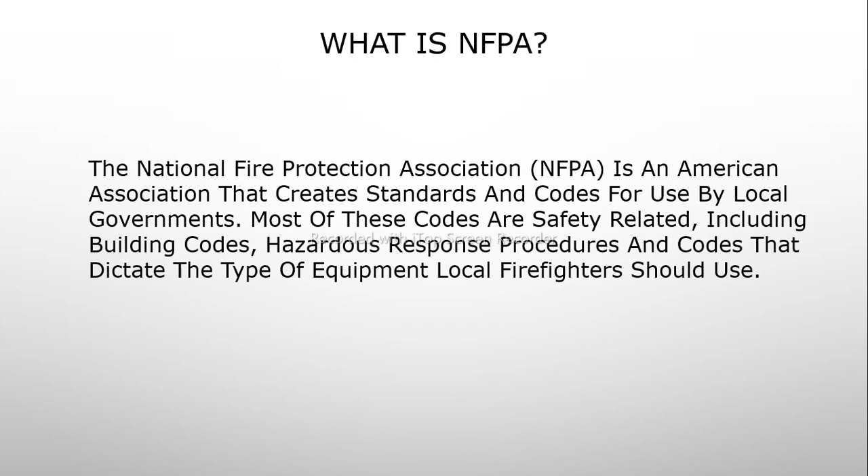NFPA Standard 31. It is the standard for the installation of oil burning equipment. Now the scope of this standard is the standard shall apply to the installation of stationary liquid fuel burning appliances, including but not only limited to industrial, commercial, and residential type steam, hot water or warm air heating appliances, domestic type range burners, space heaters, and portable liquid fuel burning equipment.

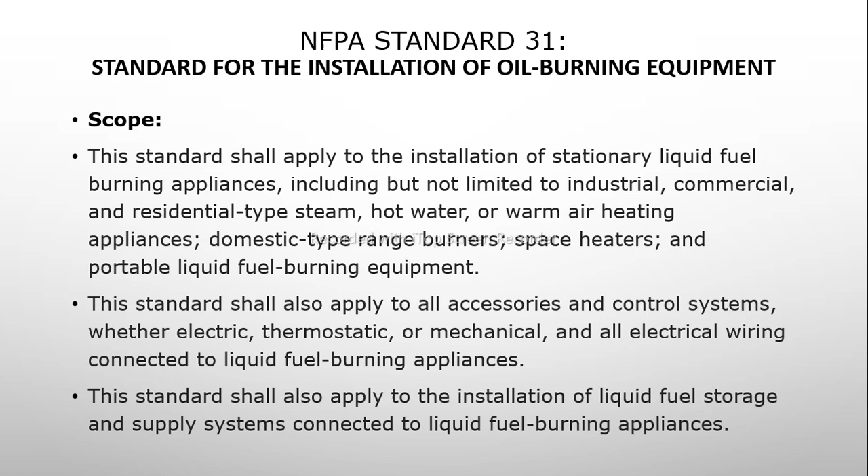This standard shall also apply to all the accessories and control systems, whether electric, thermostatic, or mechanical, and all the electrical wiring connected to the liquid fuel burning appliances. The standard shall also apply to the installation of the liquid fuel storage and supply systems connected to the fuel burning appliances. Now the standard shall not apply to internal combustion engines or oil lamps.

Now coming on to the applications of this standard. First of all, retroactivity. The provisions of this standard reflect a consensus of what is necessary to provide an acceptable degree of protection from the hazards addressed in this standard at the time the standard was issued.

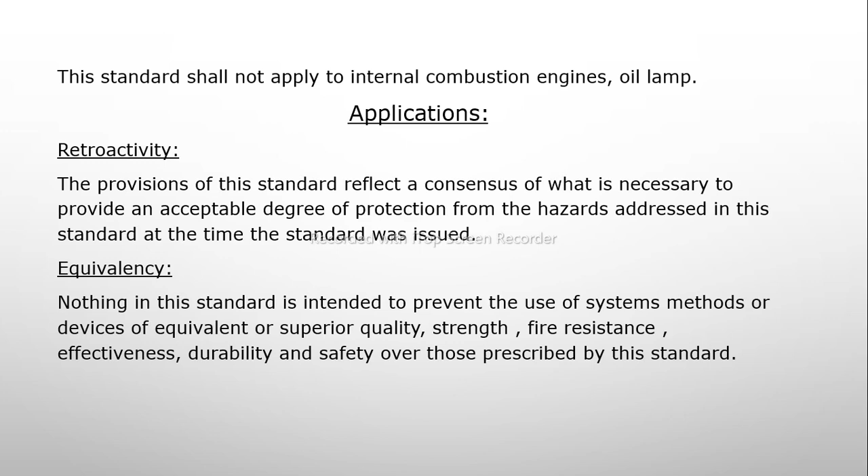Equivalency. Nothing in this standard is intended to prevent the use of systems, methods, or devices of equivalent or superior quality, strength, fire resistance, effectiveness, durability, and safety over those prescribed by this standard. Now here are some NFPA official definitions.

Talking about approved. So the standards which are considered as approved are acceptable to the authority having jurisdiction. Now what is authority having jurisdiction? It is an organization, office, or an individual responsible for enforcing the requirements of a code or standard, or for approving an organization, office, installation, or a procedure.

Now the equipment which is considered as labeled is the equipment or materials to which has been attached a label, symbol, or other identifying mark of an organization that is acceptable to the authority having jurisdiction and concerned with the evaluation of products or services, that maintains periodic inspection of production of listed equipment, materials, or periodic evaluation of services. Going to the next slide.

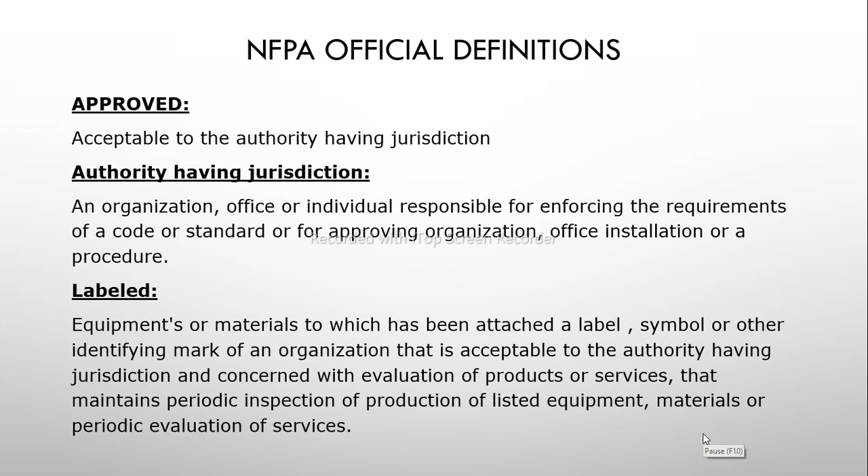Now the equipment which is considered as listed is the equipment, materials, or services included in a list published by an organization that is acceptable to the authority having jurisdiction and concerned with the evaluation of products, that maintains periodic inspection of production of listed equipment.

Now if in a standard we use shall, then it indicates a mandatory requirement, and if should is used in a standard or a code, then it indicates a recommendation or an advice, but the recommendation is not required to do. It's only considered as a suggestion to make it a better standard or a better equipment.

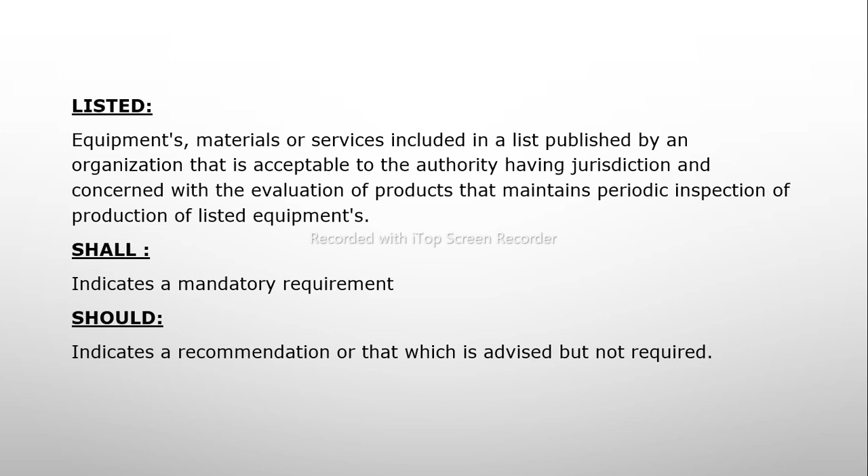Here are some general definitions. First of all, air heater. It is an indirect fired appliance intended to supply heated air for space heating and other purposes, but not intended for permanent installation. Now the anti-flooding device is a safety control device that causes the flow of fuel to be shut off when a rise in fuel level occurs, or when excess fuel is received, and that operates before the hazardous discharge of fuel can occur.

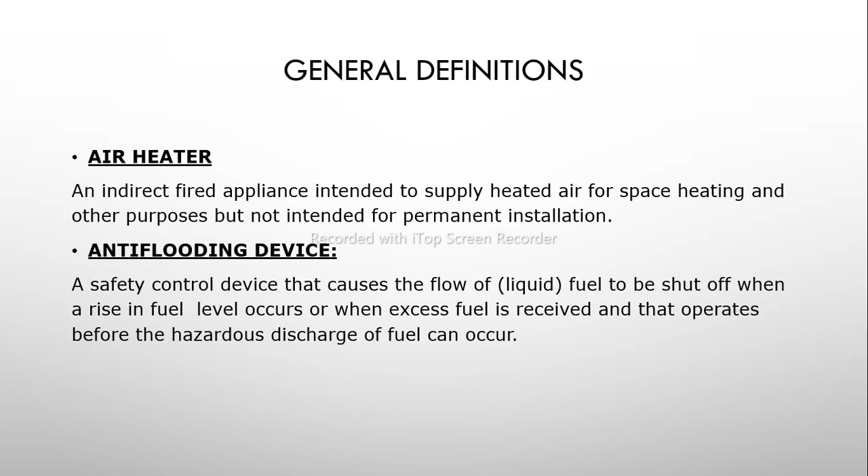A centralized heat appliance is a stationary heat appliance that consists of boilers, central furnaces, floor furnaces, and wall furnaces, while a centralized oil distribution system is a system of piping through which oil is supplied from a remote storage tank or tanks to one or more buildings, mobile homes, recreational vehicles, or other structures, and a chimney is a structure containing one or more vertical or nearly vertical passageways for conveying flue gases to the atmosphere. Moving on to the next slide.

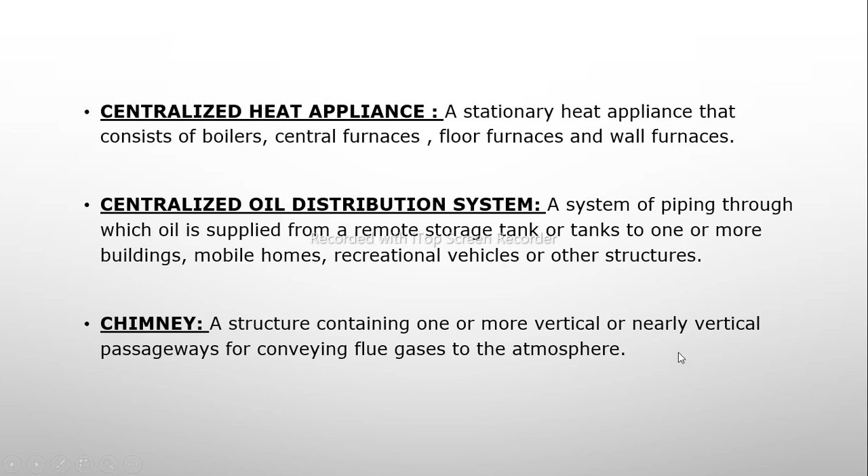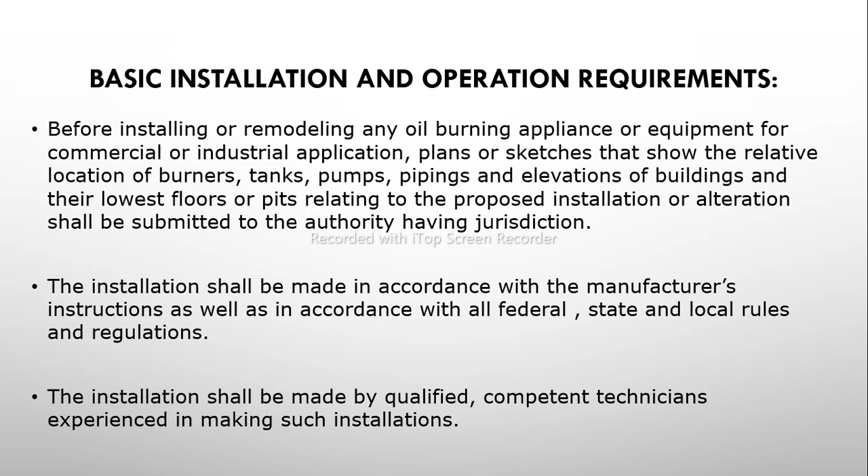The installation shall be made in accordance with the manufacturer's instructions as well as in accordance with all federal, state, and local rules and regulations. Moreover, the installation shall be made by qualified, competent technicians experienced in making such installations. Furthermore, the installation shall be made accessible for cleaning heating surfaces, for removing burners, for replacing motors, controls, air filters, chimney connectors, draft regulators, and other working parts.

The oil burning appliances shall not be installed or located in areas where combustible dusts or flammable liquids, gases, or vapors are normally present. Now, the most important point is that after installation, the appliance or equipment shall be tested for proper operation and combustion performance to make certain that the burner is operating in a safe and acceptable manner and that all accessory equipment, controls, and safety devices function as intended.